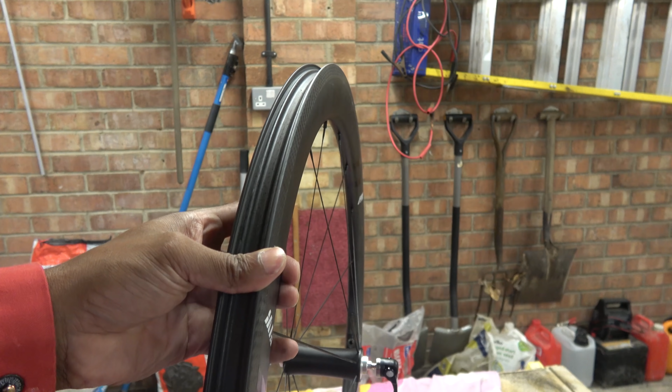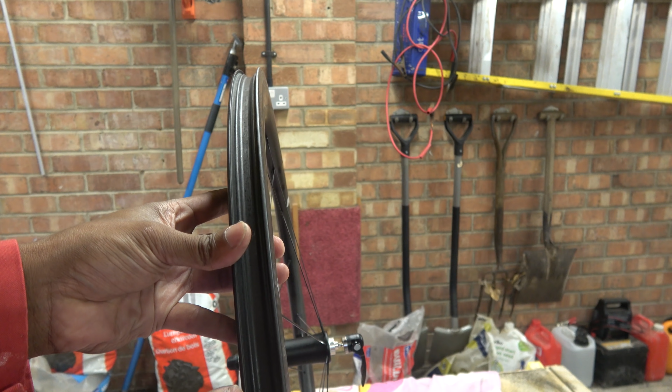Looking at the front wheel, what I've done here is taken the tyre and the tube off, and this is the cross section you can see. These wheels were really designed for tubeless, so they have no spoke holes.

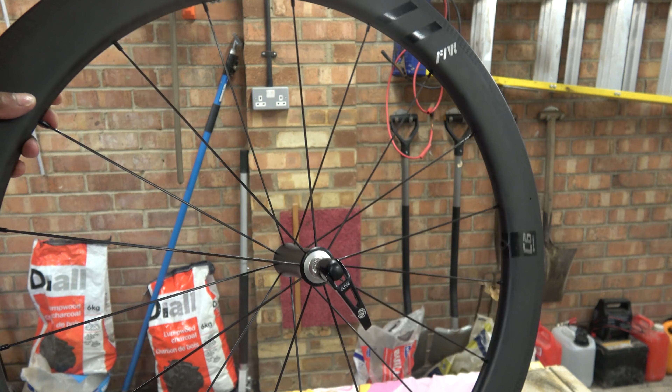The front wheel is straight laced, there's no cross lacing in there. It's about 27mm wide. It's made in sections, so you can just about see, hopefully, a seam there, and going around, there's another seam there.

These wheels have seen some fair usage, some serious usage actually. One thing to note, and I'll probably rave on about this, is the braking performance of these wheels is really, really good. They have some sort of small C-shaped grooves, almost like they put on car brake discs, that really improve the braking performance.

I've never had carbon wheels that stop quite like these ones, so they're really good even in the wet, and that's the key. These wheels have been ridden through all sorts - I've basically tried to break these wheels, and they've fared incredibly well. Didn't have any problems. The wheels have seen probably 3,000 or 4,000 kilometers.

I didn't have any problems with spoke tension. When I pumped it up, it pinged itself a couple of times, and then that was it - it stress relieved itself basically. No issues at all with the quick release levers, they're well made. Look, that's had so much use on it, there's hardly a mark on it.

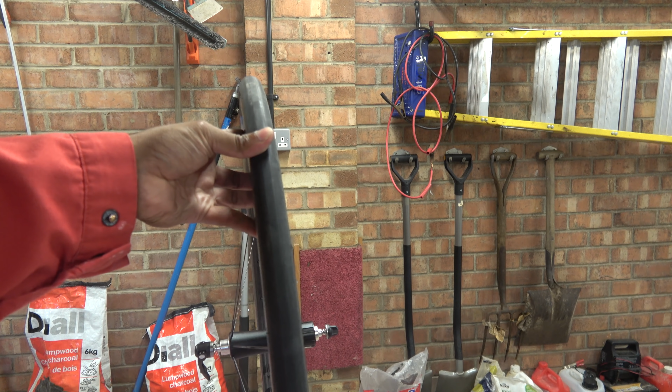So these ones fit. Now when you fit them on there, because the rim's quite wide, it doesn't really balloon at all, which is what you want. So again, that is good. The back wheel rim hasn't really seen much of the braking force.

None of these spokes on here - they're all Sapim CX rays, I think. They're flat bladed and they're all in line. Now some people might say, oh well, they've sent you a wheel set that's perfect. Well, if you're going to have it reviewed on YouTube, then I suppose you will have it perfect. The rim itself, it's not very pointy at the periphery, or the tail, let's call it, the end of the chord.

It's quite blunt there, so I guess people would say it's more of a toroidal design. I'll talk about the aero performance later.

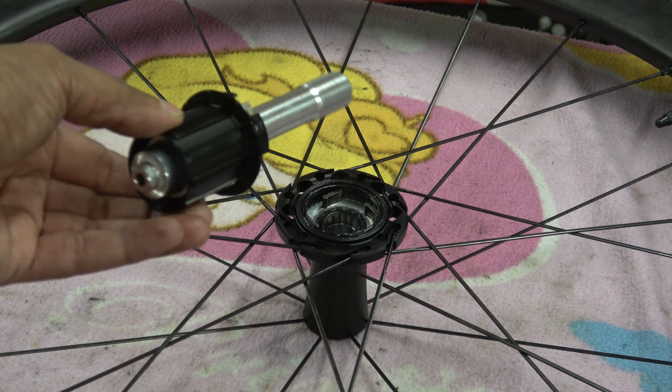What I've done here is I've taken the Freehub off. You can again see the running mark. It might not show up that well, but you can see the running marks from where the bearings have been running. The bearings are, I'd say, a bit on the soft side on the inner race.

It's a bit of an unusual setup here because that axle is extremely strong and extremely hard. The Freehub is there, so you can see what was left of the pawls, I guess. The actual pawls are in the hole, and there's 4 of them. It's hardened and it hasn't really, it's made a few marks onto the Freehub, but that's really about it.

It's that favourite time of the show again, it's time for PowerPoint. So let's see if the PowerPoint works. Oh, where's the pen? Screen, pointer options, pen. Ah yes, the pen is working.

Right, Farsports Ventoux C6, reviewed by a 5-year-old engineer. Now this is about to get a bit technical halfway through, so we'll cross that boundary when we get there. By Hambini, aged 5. I'm a part-time plumber. I do like Paw Patrol and occasionally Peppa Pig, but not PJ Masks.

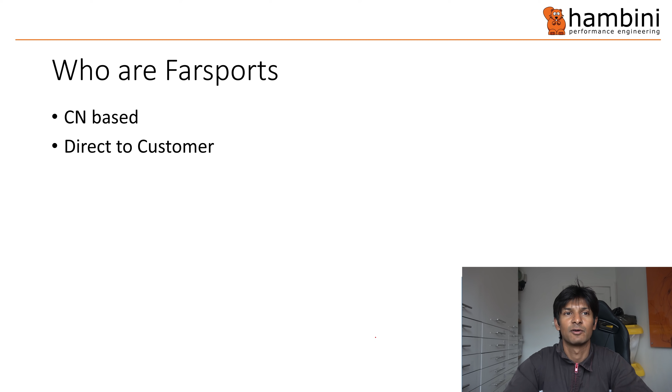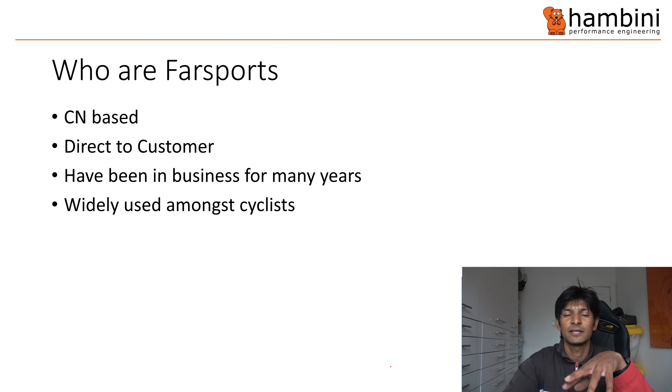But there you go. They have been in business for many years, and if you go on Weight Weenies or forums like that, you'll see lots of people have these Farsports wheels. They're not really used on the world tour. In fact, well, I don't know if they're not used on the world tour, but they are extremely popular in China. And these wheels being reviewed here have been used in the domestic market in China for, I think, 3 or 4 years, something like that.

Right, specification. They are 50mm, and the ones I've got are the tubeless variety. You can fit tube tyres to it, because I have done. So I used Vredestein. There were a couple of others that I tried as well. But anyway, there's no spoke holes, which we'll come to.

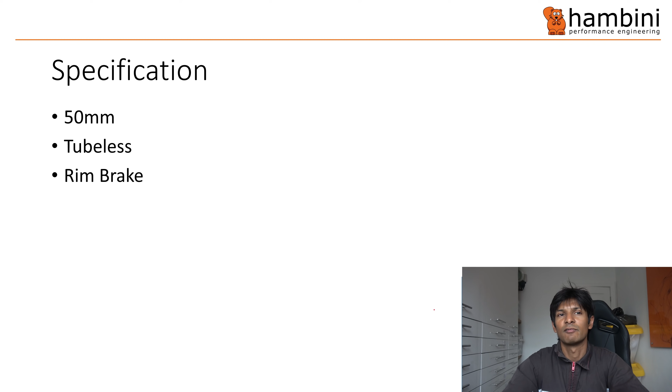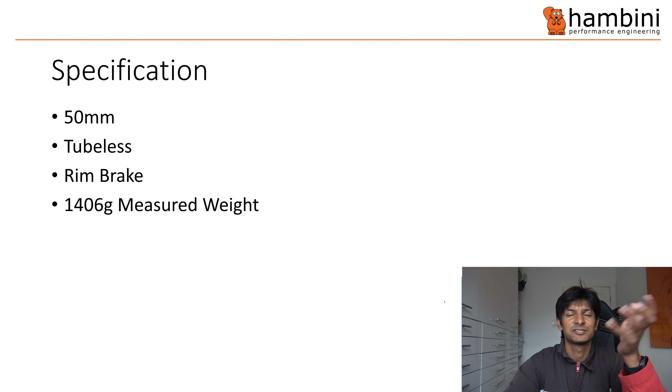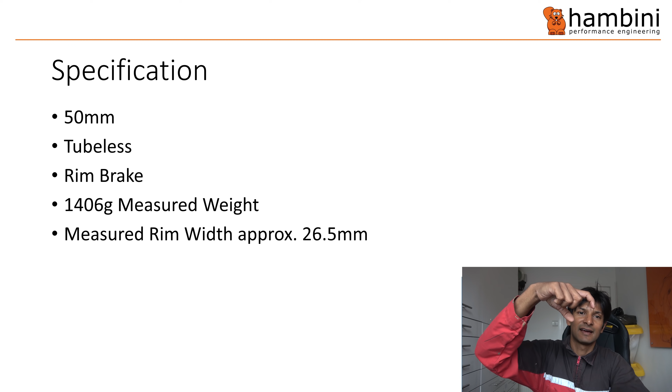Rim brake. Now, I measured them at 1406 grams. On the Farsports website, it's listed at just 1500, so I'm wondering if there's something that I measured and took off. But anyway, rim width is about 26.5mm. When I say about, it's because you've got a caliper coming in from the side, so you've got plus or minus 0.5mm. It's neither here nor there.

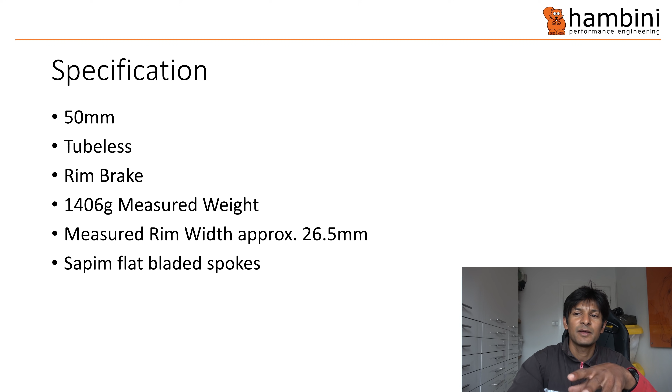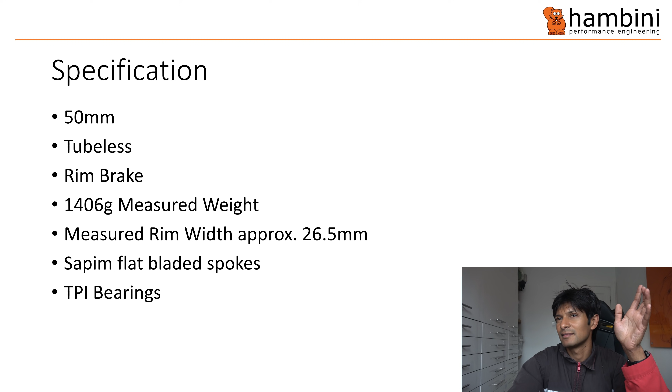Sapim flat bladed spokes. They are steel, and TPI bearings. Now, unlike the usual shit bags who are sort of in the pockets of wanketeers, I'm not. So you're gonna get a warts and all review.

Right, and I mentioned before blind spoke holes. So when you come to maintain them, if you lose a spoke, you'll need a magnet to go around and hold the nipple in.

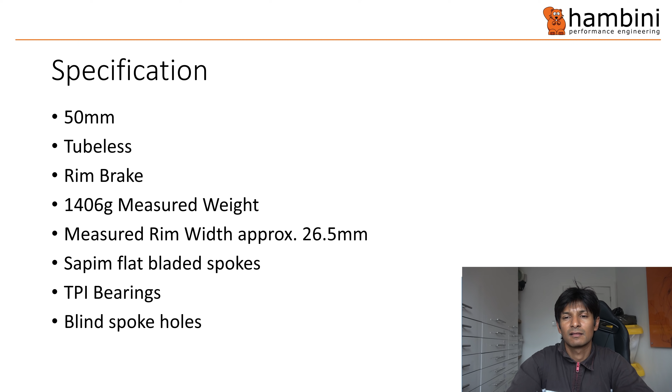Right, wheel build quality. So I've measured these, and radial run out, so that's how out of round it was, less than 0.5mm. Lateral run out, side to side, I've put less than half a mil, but the problem is where you measure it, which is on the brake track - they've put little grooves in there, so the device I was using, which is a clock, was going into the point because it had quite a small end on it. So anyway, it's probably less than 0.2, maybe 0.1, something like that. It's not very much at all.

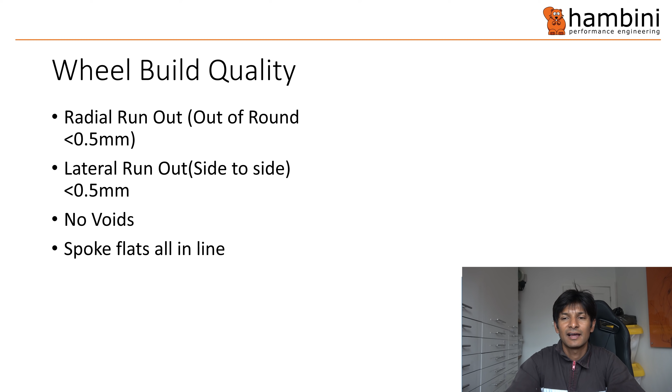It's really very good. No voids, and as I mentioned in the video earlier, all the flat bladed spokes were in line. The build quality, I would say, is really good because the wheels have been subjected to some serious abuse, and the quality of the materials used are really, really good, because you can see that. When you get your new shiny wheels, they always look nice, but go 4,000 kilometers, 10,000 kilometers down the road and you get all sorts of bits and pieces happening.

Now these wheels have been tested in summer months, so they haven't had the kind of saltwater aggressive abuse that the Winspace wheels had, for example. But nonetheless, I've ridden them along dusty tracks, well, there's basically no road, just gone to try and crash them, gone to try and trash them, and I also crashed into the back of an Opel Astra.

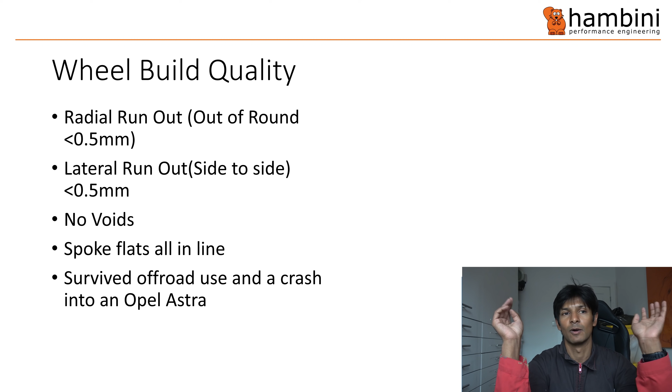When I crashed into that, I got off the floor, looked up, and there was foam everywhere. I was thinking, where the fuck did all this foam come from? It's worse than a foam party. Then I realised the bumper inside the Astra had a load of foam behind it. As I'd gone into it, it split, and there was foam fragments everywhere. There wasn't really a mark, no marks on the wheels, nothing.

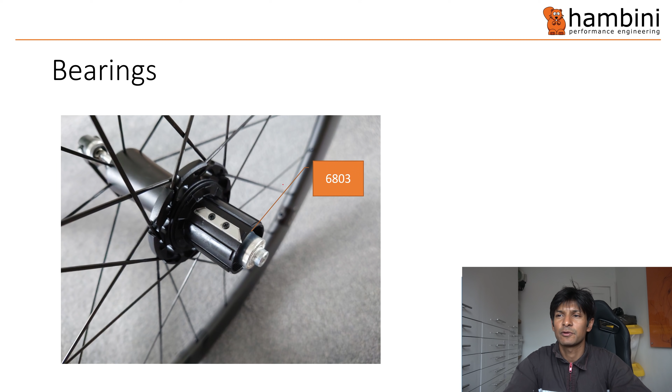Right, bearings. Now, this is the rear hub. The front hub is 6803x2, but in the Freehub, you've got 6803 on the drive side, another 6803 on the inside of the Freehub, so you'd say the non-drive side of the Freehub, 6903 inside the drive side of the hub, and a 6803 inside the non-drive side of the hub. Just look at my drawing rather than listen to me talk bollocks.

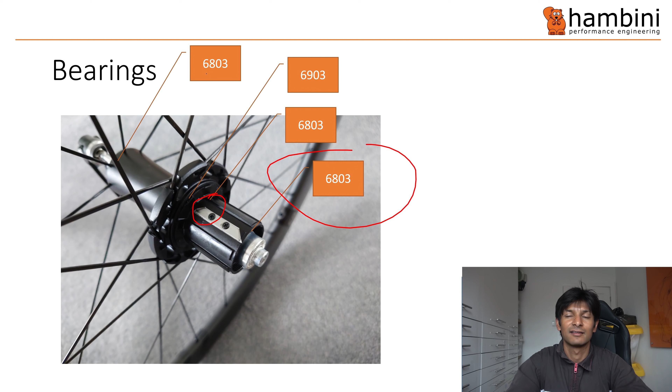Right, I also measured the fits. Now, I've seen many wheels where the fits have been really tight and they put a really expensive bearing in and it fucks it royally. It's like ratcheting round. It's generally not a problem with the bearing, it's almost always an issue with the housing. Now, in the case of wheel hubs, you can go from one extreme to another. The best made hub with shit bearings in it is generally better than a shitly made hub with very, very good bearings in it. So that's how much effect it has.

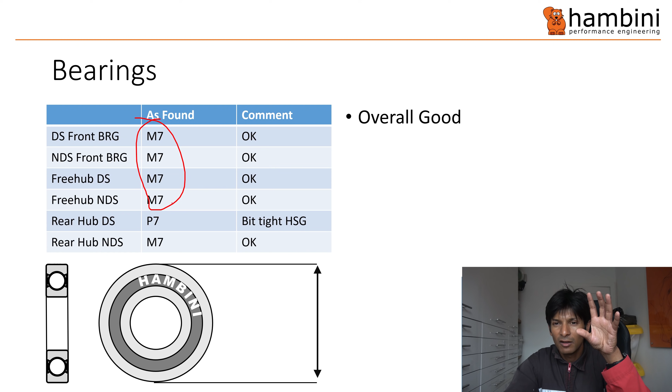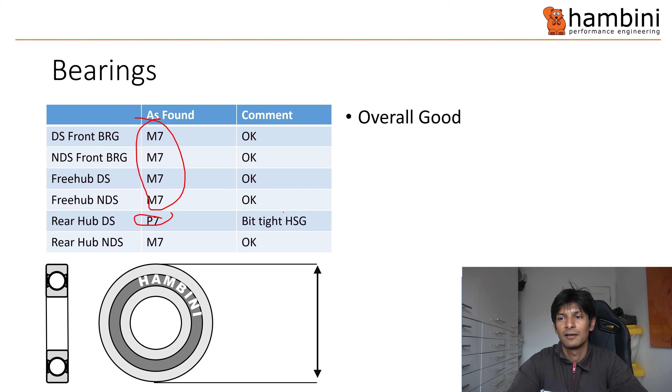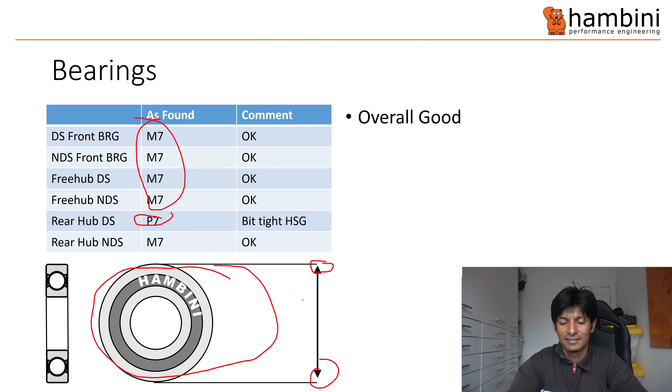So don't counteract that. Right, these are the fits. Generally you'd want M7, so all of them M7. The one on the rear hub drive side was P7, so it's a little bit tight. It's not, in hubland, that's probably me being picky. And then all the others in spec, basically. Overall, very good. So what I'm doing is, this is my shite drawing of a bearing down here with my name on it, and then you just measure the outside. So an M7 fit, which is a fairly common interference fit, M7, N7, P7 with a capital. Remember the capital because it indicates the housing fit.

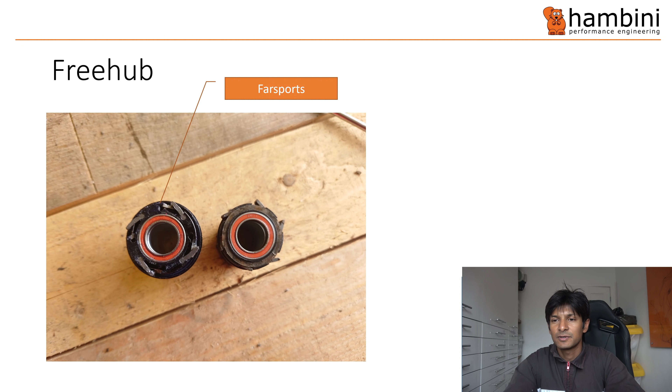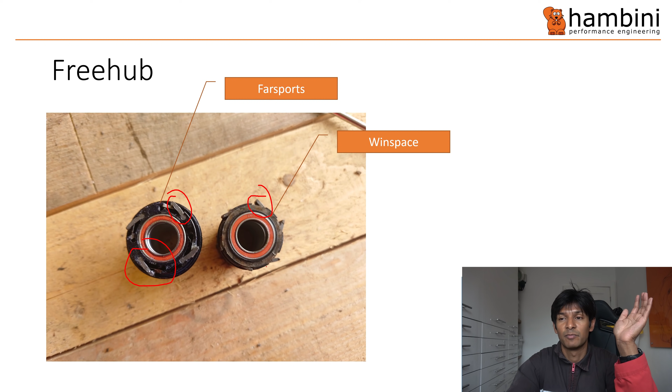This is the Freehub. So the one on the left is the Farsports Freehub. You can see it's got 4 pawls. The one on the right is a Winspace hub. Now I would say, just based on their design principles, I think they have come from very similar designers, possibly factories. Just looking at the parts involved and some of the geometry makes me think that. They have the same bearing setup, but on the overall outside of the hubs is different. The Winspace has 6 pawls, the Farsports has 4. To be honest, there's nothing wrong with either of them. I've not had any issues at all with both of them.

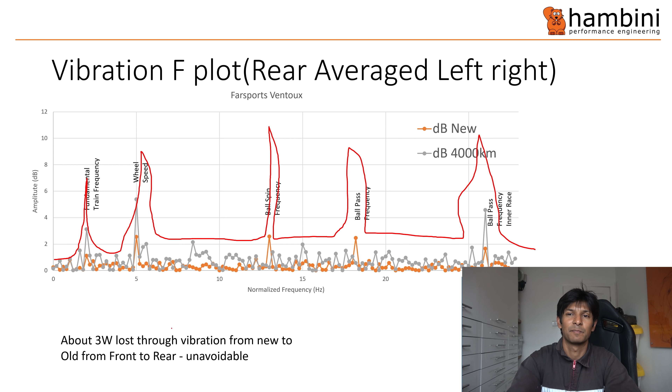Someone asked in the comments of another video how much is lost through vibration. It's about 3 watts - that's thermal loss and movement loss, kinetic loss from bearings that don't geometrically constrain the item in line. It's like driving a car down a rutted road versus one that's billiard table smooth - on the rutted one, the suspension's going up and down and you can't put the power down. It's the same thing inside a bearing because the surfaces have become rutted. So it's about 3 watts, and it's unavoidable - you can't do much about it.

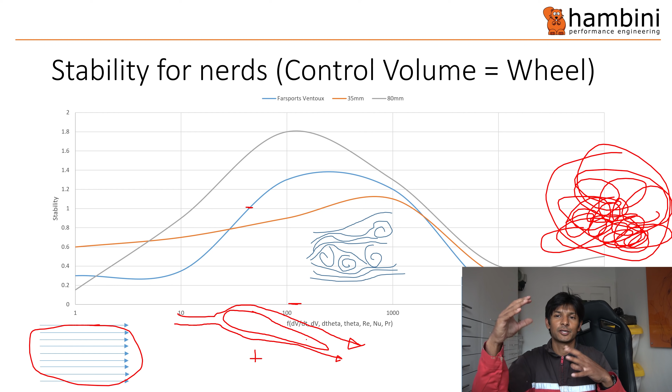You will get to a point where the flow cannot be maintained, and you build up a huge pressure differential and it just implodes. So if you're riding a bike and you've got a crosswind, you'd have to be extremely strong for it to blow you off. More likely is when you get a turbulent blow-off - if you go past a truck, the pressure on one side of your wheel builds up, then suddenly collapses. So it is a transient event - real world riding along a road is never in steady state.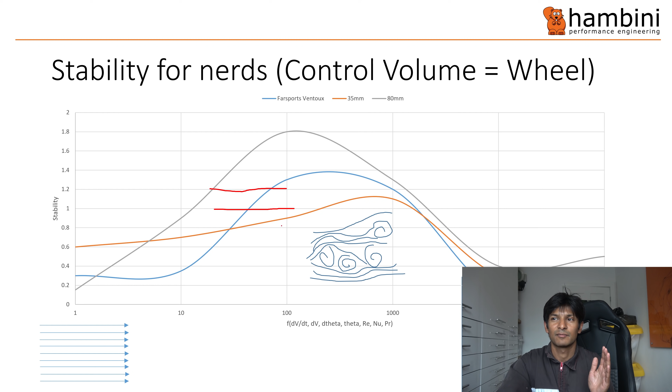So all of this lot, which is where most bike wheel manufacturers do their plots, is not realistic. The stability criterion we've generally used here is somewhere between 1 and 1.2 as your limit of stability. Let me clear the ink and draw that line back in - so 1 and 1.2, those are your limits. Now if you were to ride along a normal road with 35mm wheels, you would be unstable for only that amount.

If you were to use 80mm wheels, you'd be unstable from here to here, so your operating window is much narrower. But bear in mind, this is not drag, this is stability - there's a difference. Over here, the wheel is extremely stable, and that's because the bigger you make the aerofoil section, where you've got nice parallel, clean flow, the faster you will go, and the restraining moment is smaller.

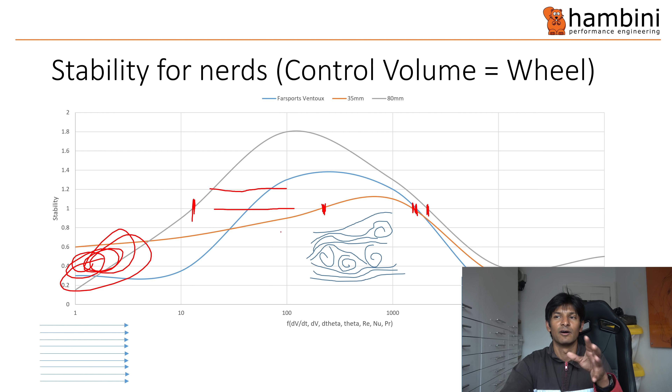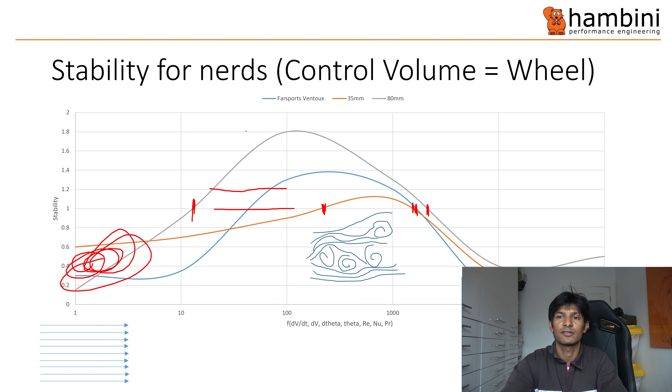Now, one of the key things that people market their wheels on now is not so much the ultimate aerodynamics, it is stability in crosswinds. This isn't quite perfect, so it needs a bit of refinement, but I put it on there. The Farsports Ventoux is quite a stable wheel, so I wouldn't argue too much about that. But I put the 35 and the 80s on there too - sorry for me ranting on.

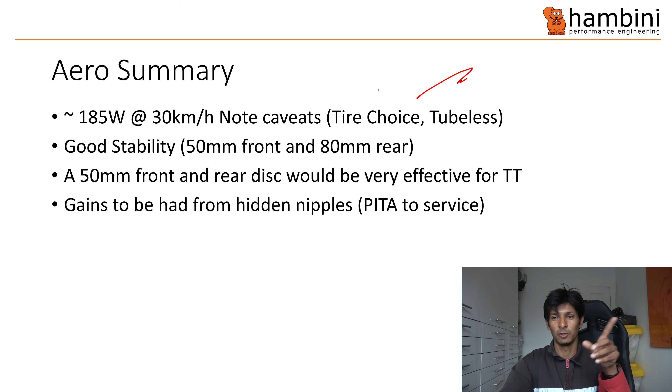Right, we've done this slide. So the pen's working. At 30 km/h, the power loss is about 185 watts. Just be aware that people look at the graphs on the website - you can't really apply this exactly to those graphs because they were all done with Continental GP4000 tyres. You can no longer buy those, so you're limited to whatever's available. So Vredestein is what I used. I think you could probably get it down a little bit lower if you chose a different tyre combination for the wheel.

I've just mentioned it - the stability is quite good. 50mm front and an 80mm rear, that'll be quite good. And then also, if you want to put a disc on the back, you can't have hidden nipples on this wheel because it has no holes, so you are stuffed in that regard. Bear that in mind.

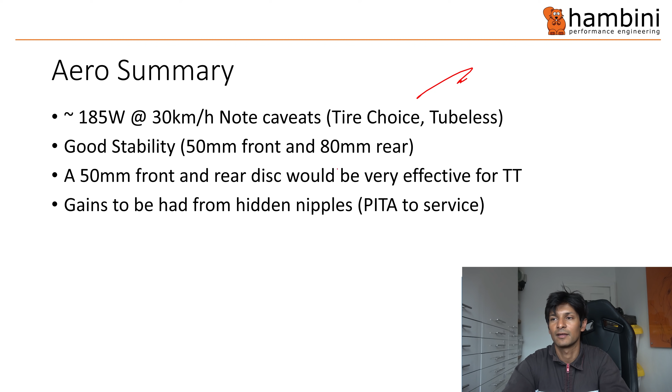Right, the good - what is good? Decent hubs, well designed, well made. Wheels stay true even after the crash into the Astra. Extremely well made, good stability. The technical support was excellent.

Now you might say, well, you got really good technical support because you've got 70,000 subscribers on YouTube. Well, that might be the case, but I can't really comment any other way. Braking performance was exceptional. If you go on their website, it talks about how those are machined in, and there's some sort of geometrical equation for it, which is way too complicated for my little mind.

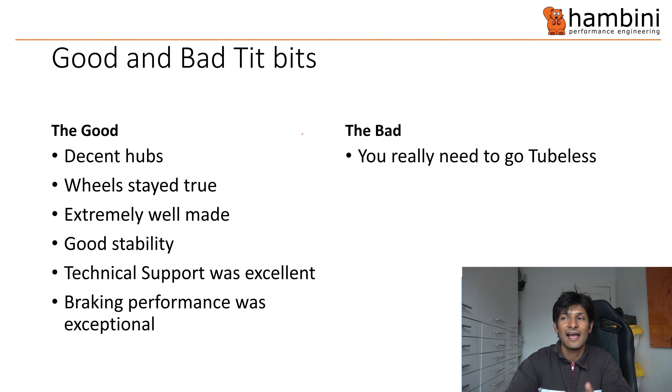Right, what is the bad? Really, to get the ultimate in performance, you need to go tubeless. That brings in its own quirks, filling it with sealant and all this stuff. You can use the Vredestein, as I have, but it's not designed for that. So you get better performance with tubeless, but obviously also the compromises.

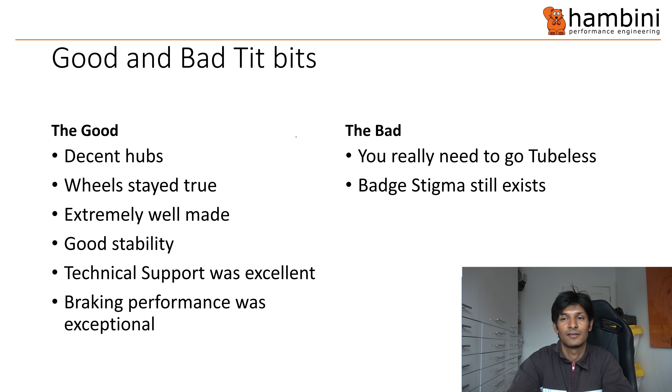Badge stigma still exists. If you go to any sort of club ride, people want Roval or Bontrager or Zipp. Those days are rapidly going out the window. There is still some stigma, but it's diminishing so quickly - I don't think that's going to happen much longer. These wheels are a lot like the other stuff that comes on here. They are well made - if you took the badges off, you'd be hard pushed. In fact, I'd say they were better than a lot of the named brands.

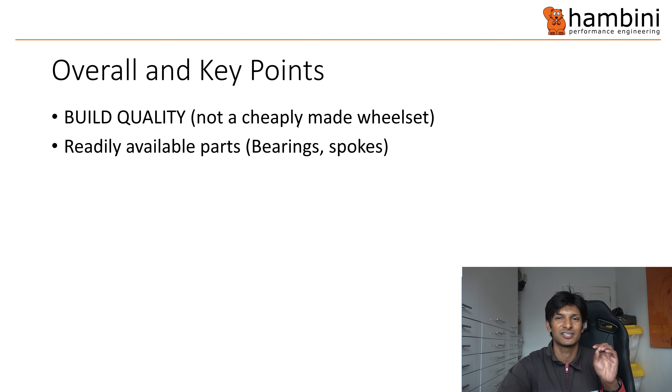Right, overall and key points. First of all, the build quality - these wheels are not a budget wheel set. It's maybe a brand that's not so widespread, but it's not budget. Build quality is really good. Quality of the materials, quality of the finish, the wheel tension - everything really good.

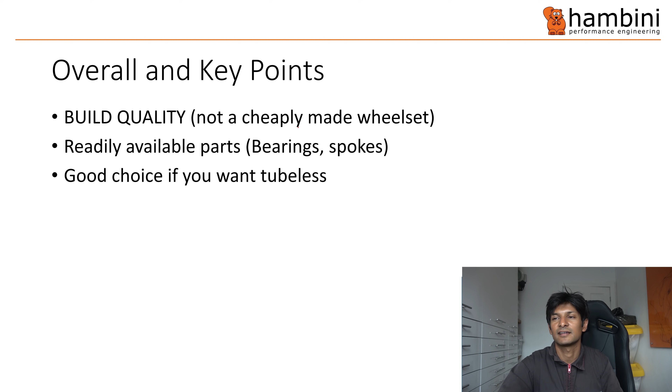The parts to service it are readily available. The bearings are standard 6000 series, none of this bollocks with odd sizes - they're off the shelf, you can go and get them. Spokes are Sapim, again fairly readily available. If you want to go tubeless, that's a good choice.

Right, questions and comments. What do you think about the way manufacturers from China are going? I think they're gonna increase their market share. I think the days of Zipp are numbered - even they've moved their manufacturing to the Far East.

So that's that - direct to consumer sales. Now, obviously, I make bottom brackets, and they are all direct to consumer sales. They have no middleman in between, and generally feedback has been pretty good.

And what is your opinion on Farsports as a whole? There's plenty of people I see in the comments below that have these Farsports wheels, not specifically the Ventoux ones, but they have no issues with them. So if you've got any comments, open the discussion up and we can go from there.